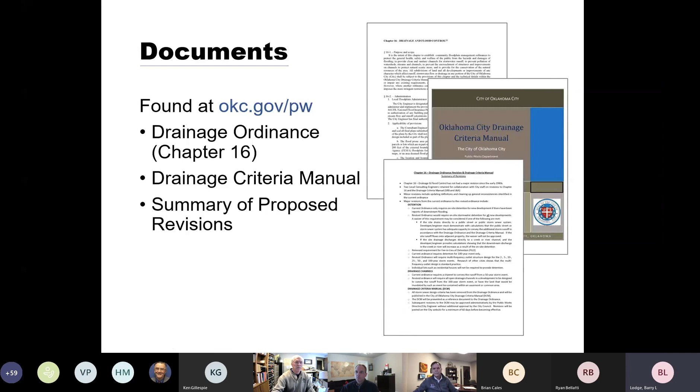The agenda for today's meeting: we're going to discuss and go over the drainage ordinance revisions. The Chapter 16 revisions include the definition updates, and we were cleaning up inconsistencies. And we're going to discuss the drainage criteria manual, which is something new, and we've been

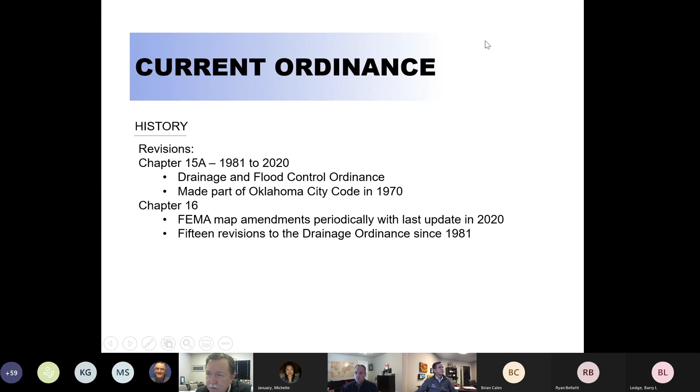You went mute. Oh, I thought it was just me, Keith. Yeah, I'm not able to hear anything either. Yeah. So Debbie, so did you not hear anything I said? We're hearing parts of it, and then we lost you. You went mute, maybe slide number 2. Oh, it's slide number 2. Okay, well, let me go back and I will start over. Okay. I'm really glad you guys are all here, and I apologize for the mute. I don't know how that happened.

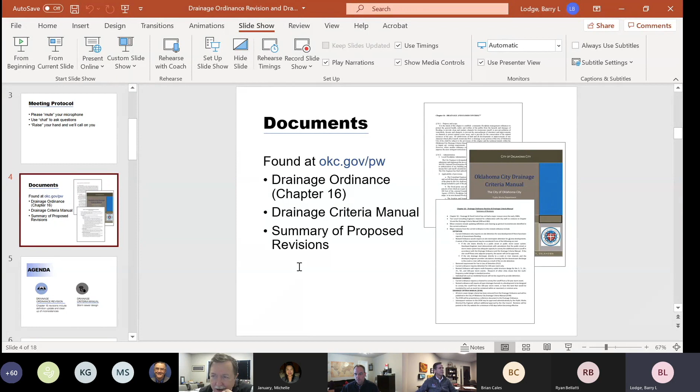The agenda for today: we're going to discuss the revisions we're making to Chapter 16. Part of that is definition update and cleanup of inconsistencies. And we're also going to talk about the new drainage criteria manual. And like I said previously, I'm really excited that we get to bring this to you. This has been a lot of hard work that staff and our consultants have worked on. And I'm anxious to hear what you guys think.

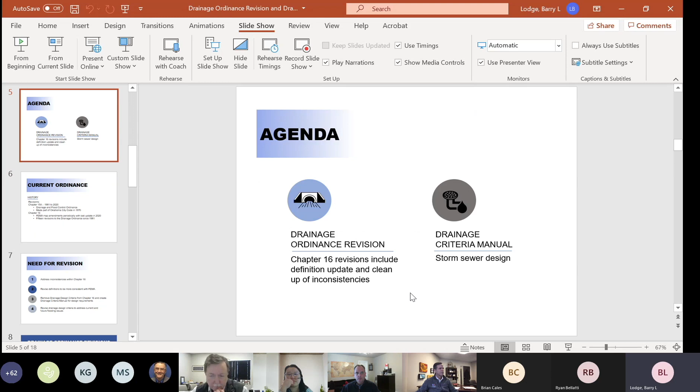Okay, a little history. And this was interesting, I didn't realize this, that the drainage ordinance was put into the code in 1970 as Chapter 15A, and it was the Drainage and Flood Control Ordinance. Since then, we have had 15 revisions approved by Council since 1981, updating the ordinance. We do have periodic updates every time FEMA has a mapping update on their maps, and so those are also included in the ordinance.

The need for the revisions: we need to address the inconsistencies within Chapter 16. We wanted to revise the definitions to be more consistent with FEMA. We wanted to remove the actual design criteria out of the ordinance and make it more of a regulatory document. So that's where the drainage criteria manual comes in. And revise the drainage design criteria to address the current and future flooding issues. Every time it rains, we get complaints, and so a lot of the updates are to help address those.

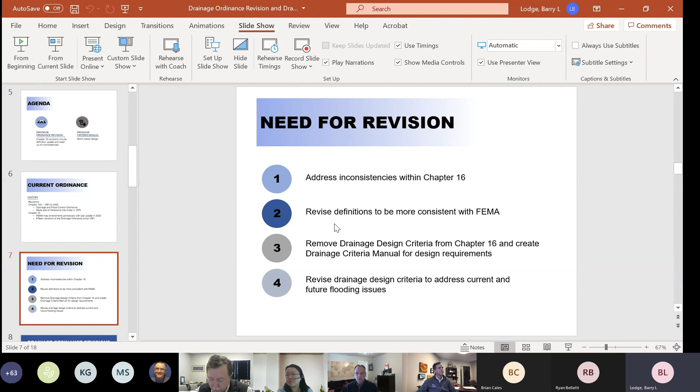I'm going to turn this over to Barry Lodge, and Michelle is on the line too, and he's going to go through the changes and what's included. There you go, Barry. All right, well, this is Barry Lodge with the Public Works Department, City of Oklahoma City, to go through the major changes that we're making to the drainage ordinance and what's being added into the drainage criteria manual.

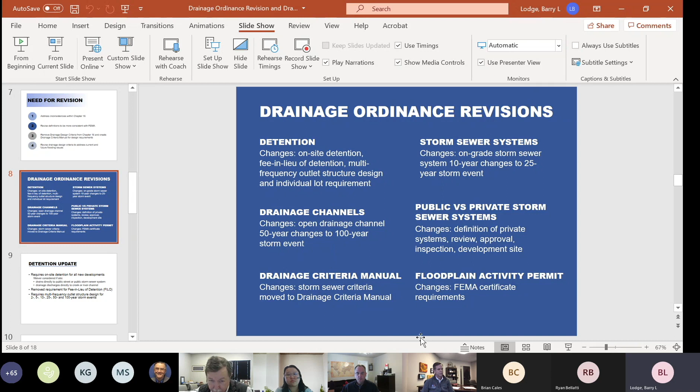I'll go through all of these. When we get to the end, we'll open it up for some questions, but just for continuity's sake, wait until we get to the end for your questions. You can raise your hand and then we'll open it up. Michelle, as I'm going through this stuff, if you have something you want to interject, jump right in. I'll try not to belabor too many of the points.

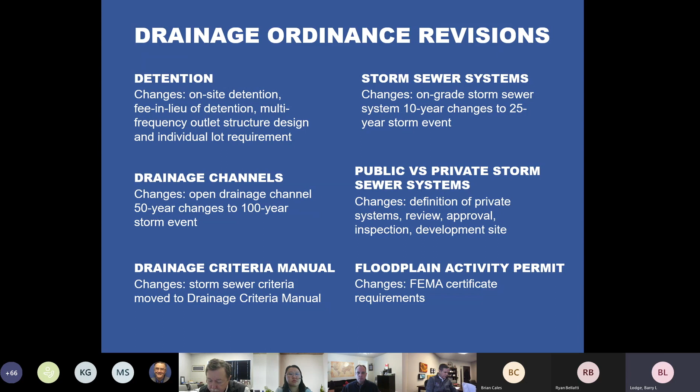The slide that's up there now shows kind of the major items that are being changed that we're addressing. Detention, open drainage channels, our drainage criteria manual, changes to the storm sewer system design criteria, public versus private storm sewer systems. That'll be kind of a big change to it. And then we're making some revisions to our requirements on the floodplain activity permits.

So starting with detention, this is something that we've been looking at. All of the consultants that have been doing design in the city of Oklahoma City for any length of time at all will understand that currently our requirement is for detention for the 100-year storm only. So one of the things that we are doing is going to a multi-frequency outlet design. And I'm starting from the bottom of the slide, hope that doesn't mess anybody up. So we're going to start requiring the outlet structures to be designed for the 2 through the 100-year events instead of just the 100-year event.

Another change: previously we had an allowance in the ordinance for a fee in lieu of detention based on certain criteria. We are taking out the fee in lieu of detention, and substituting in its place a waiver of the detention requirement that will be possible. A couple of circumstances where the waiver would be considered would be if your site drains directly to a public street or a public storm sewer, or if your site drains directly to a creek or a river channel.

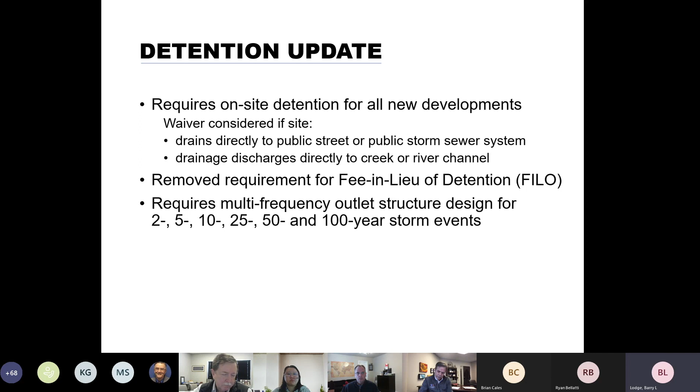An area where we would not give consideration to the waiver for the detention would be if your site discharges onto an adjacent property. In that case, if a waiver was granted, you'd be increasing the discharge onto the neighbor's property and thereby potentially damaging their property. So that would be one of the circumstances where the waiver of the on-site detention would not be considered.

The next fairly major change is on our open drainage channels. Currently the ordinance is set up so that land lying below the 50-year storm had to be contained within the channel, within the easement. So we're changing that to a requirement for the 100-year storm event instead. If you're grading a new channel, it would have to be designed to convey the runoff from the 100-year storm event. In the case of an existing channel that is going to be in a common area or an easement, that common area or easement will now have to cover the full area that would be inundated by the 100-year storm event.

And I will throw in here also that as we're talking about the 100-year event, the 50-year event, all of these storms, we are updating the ordinance to state that those are based on the higher of the FEMA Qs or urbanized discharge Qs. If none exist, one would have to be calculated. But that would be the requirement with the drainage channels.

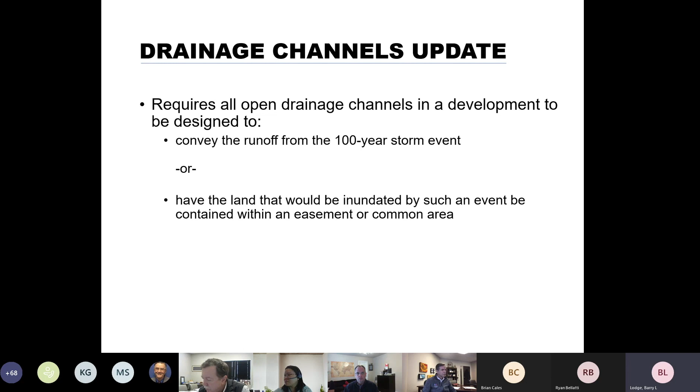One of the more significant changes in the ordinance is that we are removing the design criteria that's been previously published in the ordinance and moving it into a separate drainage criteria manual. This has been in the works for a number of years, and so it's going to be really nice to have this readily available to everyone. So we've taken that out of the ordinance.

The DCM, however, is referenced as part of the ordinance. So it's being approved simultaneous with the revisions to the drainage ordinance. The main thing that is written into the ordinance for the drainage criteria manual is that as we go through and see the need to make revisions to our drainage criteria, that revision can be approved by the city engineer without having to go back through the council. And that's more of a time savings issue on going that route with it.

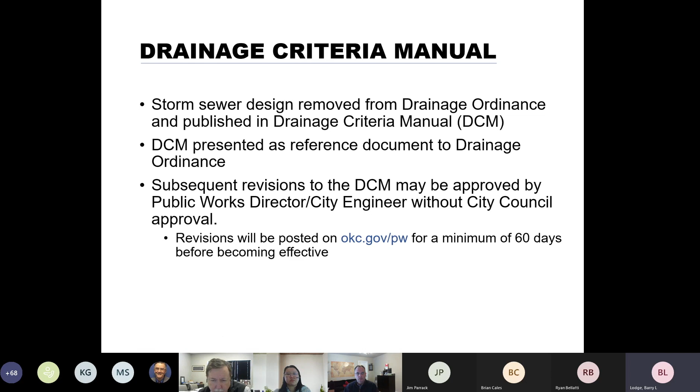We have discussed it internally, and so if we come up with any revisions to the criteria manual, we will post those on the website. We're looking at a minimum of 60 days before those revisions become effective. So we're not going to try to spring anything new on anyone, where you submit a set of plans and all of a sudden some of the criteria change. Those will be posted.

Another revision to the ordinance and the design criteria will be for the storm sewer systems. Currently, the ordinance states that storm sewer systems are designed for the 10-year event. The streets have to be designed to carry the 25-year storm without exceeding the top of curbs, and we're going to keep that requirement. However, we're going to change it to a 25-year storm event design. And a lot of that has to do with just complaints that we receive on street flooding, intersection flooding, and it's kind of a step to try to eliminate or at least reduce some of the occurrence of flooding situations that we come up with.

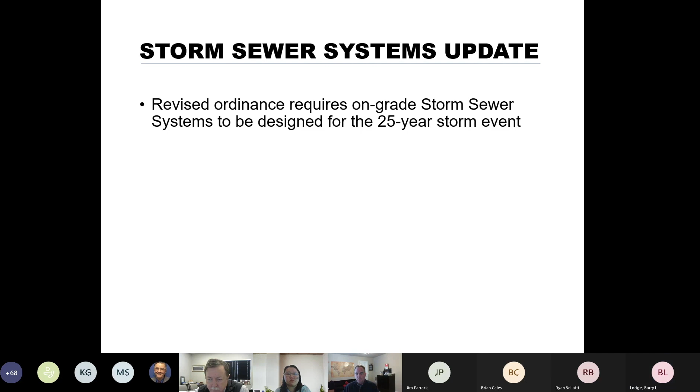The next item, and previously I don't believe there had been any discussion in the ordinance concerning public and private storm sewer. So we've added language to the ordinance about public and private systems, and this has been an issue that has come up several times over the last number of years concerning what's public, what's private, who's going to regulate what systems. And so we've tried to explain or define some of the differences between the public and private. So I'm going to read through these. I know you guys are all capable of reading the slides just as well, but just so we get it out there.

So the first criteria, if all of the stormwater runoff on a development site is generated on that site, the storm sewer system will be private and will be maintained by the property owner. The city will not take ownership or maintenance responsibility for that type of system. When we get to the private storm sewer systems, this will be a change in relation to how things have happened in the past.

Previously, the public and private storm sewer systems were required to be submitted to Public Works Engineering for review and approval. That will no longer be the case. Private storm sewer systems will not be submitted to Public Works. We will not review or approve them. They will not be inspected by Public Works inspection staff. Instead, the private storm sewer systems are going to be submitted to plan review in development services. They will be responsible for the review of plans, and their plumbing inspectors will be doing the inspection.

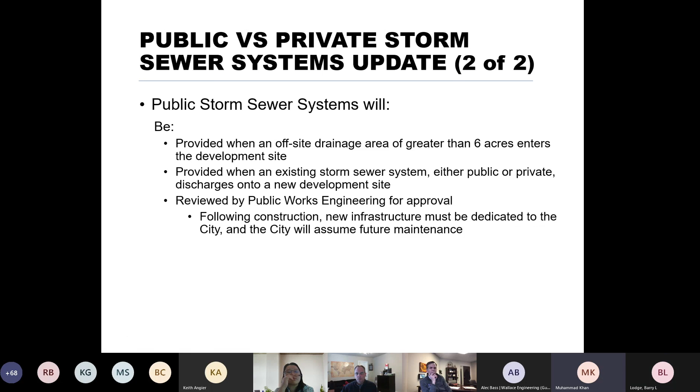Muhammad, you have a question? Thank you, Debbie. This is Muhammad with SMC Consulting. Going back to the review of private storm systems by development services, what type of design criteria will they be using to review the private storm system? Are they thinking to go to the International Plumbing Code, which is entirely different than how a site storm sewer system is typically designed? Thank you.

That's a good question, Muhammad. This is my interpretation of it. I don't know that we've actually had that specific discussion yet. My interpretation is that your design of the system will still be the same design, the same design criteria that you would use for a public system. I think it's gonna come down a lot to the plumbing code as they are inspecting the construction.

As far as your on-site storm sewer systems, you can set your design frequency. That's not really going to be reviewed as part of that private plan submittal. So it's going to be a combination. A lot of this is going to put the responsibility for coming up with the design criteria onto the consultants. We've had that requested a number of times: why does the city get involved in reviewing private drainage systems? And so this has been kind of our compromise on that. I hope that answers your question.

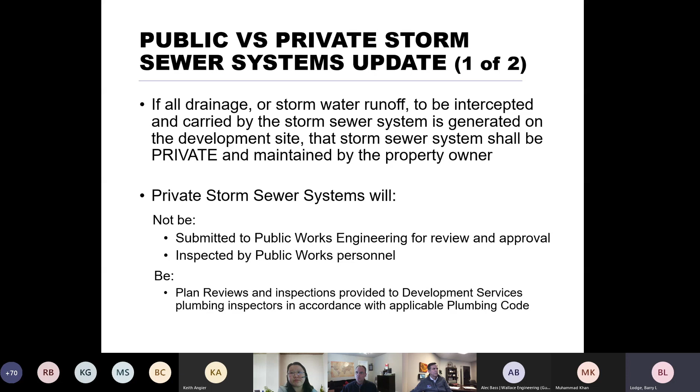All right. The next change that we are looking to make is on the floodplain activity permits. We've had some questions and comments in the past concerning the requirement for FEMA elevation certificates for structures that are not within the limits of the FEMA mapped floodplain, but that are within 200 feet of the boundary of that mapped floodplain. So the new requirement will be that the FEMA elevation certificate will no longer be required for buildings or structures that are adjacent to and within 200 feet of a FEMA mapped floodplain.

However, we still will have the requirement that in those situations for the two-part building permits, a surveyor's elevation certificate will be required prior to the issuance of the final portion of the building permit. If the structure is within the limits of the FEMA floodplain, it's a location that's had a LOMR based on fill or a LOMA based on fill, or it just happens to be above and the FEMA floodplain covered that structure, a FEMA elevation certificate will be required in those situations.